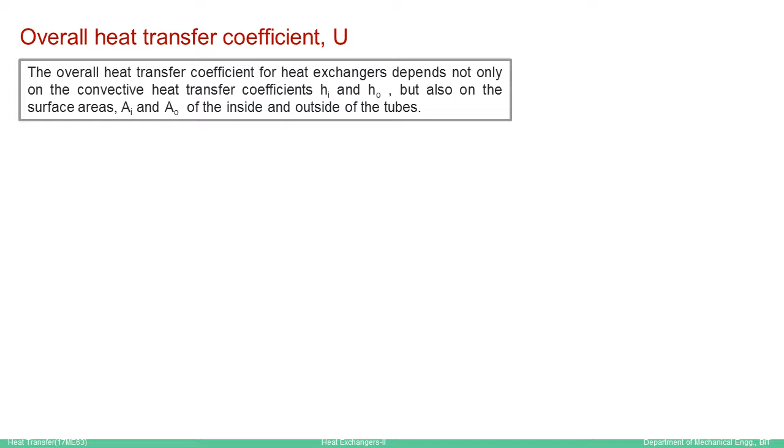Overall heat transfer coefficient in a heat exchanger is a measure of the rate of heat transfer between two fluids which are separated by a solid surface. And this does not only depend on the heat transfer coefficients Hi and H0, but also on the surface areas Ai and A0. But if the solid surface is a plane wall, then Ai and A0 can be considered equal. In such cases, U will be dependent only on Hi and H0, but most heat exchangers use tubes and/or pipes.

In such cases, it is good to consider a hollow cylinder, that is a pipe or a tube, in which Ri and R naught are the inside and outside radius. Ri is the inside radius and R naught is the outside radius. And in this case, Ti is the temperature of the hot fluid inside the pipe, and T naught is the temperature of the cold fluid outside. Similarly, Hi is the heat transfer coefficient of the hot fluid with the inside surface, and H naught is the heat transfer coefficient of the cold fluid with the outside surface.

L is the length of the pipe or the tube. K is the thermal conductivity of the material of the pipe or tube used. T1 and T2 are the temperatures of the inside surface and outside surface respectively. Q is the rate of heat transfer. Under steady state, this rate of heat transfer Q is given by this equation, where the first term gives the rate of heat transfer due to convection from the hot fluid to the inside surface, whereas the second term gives the

conduction heat transfer rate through the material, and the last term, Q is equal to 2 pi R naught L into H naught into T2 minus T naught, gives the convective heat transfer from the outside surface to the cold fluid. And this equation can be written in terms of temperature difference like this: Ti minus T1 is equal to Q by 2 pi Ri L Hi. Similarly, T1 minus T2 is equal to Q by 2 pi KL divided by ln of R naught by Ri. T2 minus T naught is equal to Q by 2 pi R naught L H naught.

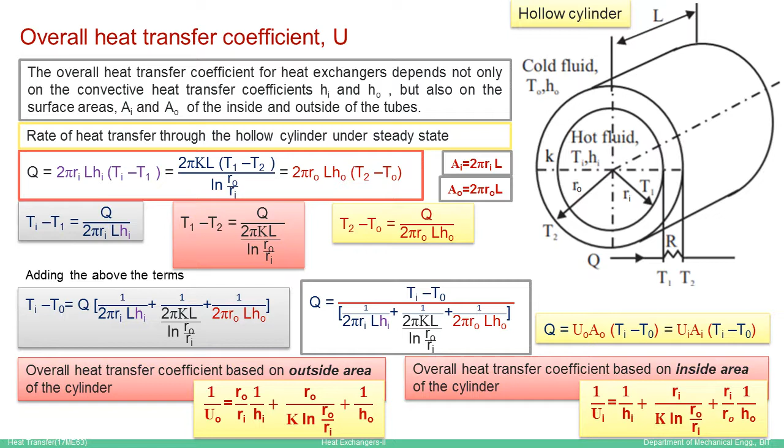To summarize the previous discussion, this equation is equated with the expression for rate of heat transfer, and using A naught equal to 2 pi R naught L and substituting that, we have obtained this overall coefficient. I want you to go through these steps and arrive at the final expression. Similarly, equating these two Q's and considering Ai is equal to 2 pi Ri L, the overall heat transfer coefficient based on inside surface area of the cylinder is obtained this way. This is a small assignment for you to work out and obtain the final expressions for U naught and Ui.

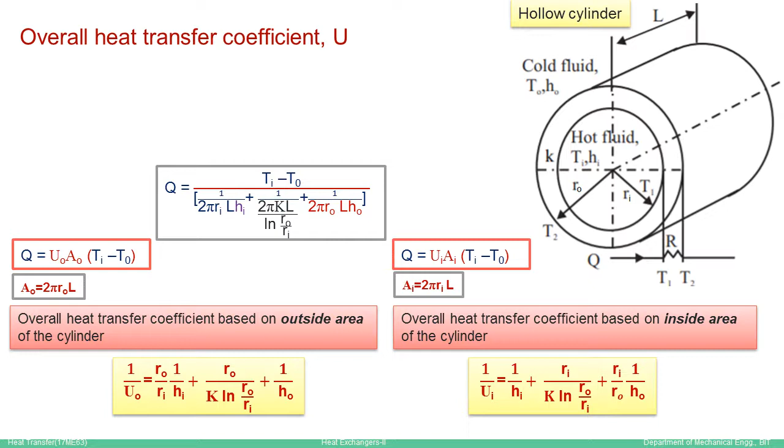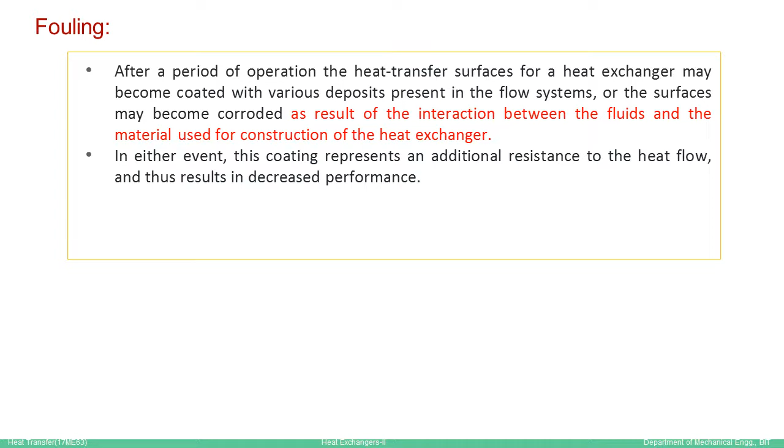Fouling is an undesirable condition in heat exchangers which reduces the performance of heat exchangers. Usually after long periods of operation, the heat transfer surfaces of the heat exchanger will get coated with some of the deposits from the materials or from the liquids itself, or sometimes the surfaces may get corroded because of the frequent interaction with the fluids. In both cases, there will be some resistance to the heat flow because of this coating formed, which results in the reduced performance.

And finally, the overall effect is to present a term called fouling factor or fouling resistance, RF, which must be included along with the other thermal resistances, so that total resistance is different from the actual resistance considered in the overall heat transfer coefficient. So an additional parameter is to be accounted for in the overall heat transfer coefficient. We'll see that in the next few slides.

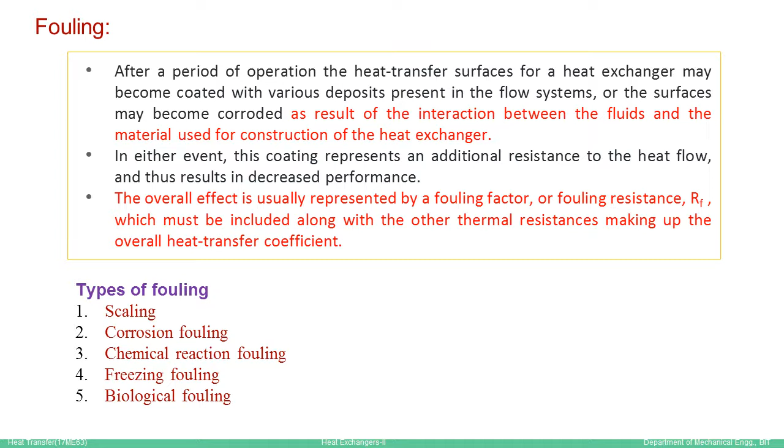Before that, we'll try to understand the different types of fouling that can happen in a heat exchanger. They are scaling, corrosion fouling, chemical reaction fouling, freezing fouling, and biological fouling.

Scaling is the most common form of fouling, and it is associated with inverse solubility salts. For most salts, solubility increases with increase in temperature. That means the higher the temperature, the more dissolved a salt is in that solution. But for some salts like calcium carbonate, calcium phosphate or calcium sulfate, their solubility decreases with increase in temperature.

When the temperature of the solution is increased, the salts get separated from the solution and get deposited on the surface of the heat exchanger. Such salts are called inverse solubility salts, and in such cases this deposit becomes a part of fouling.

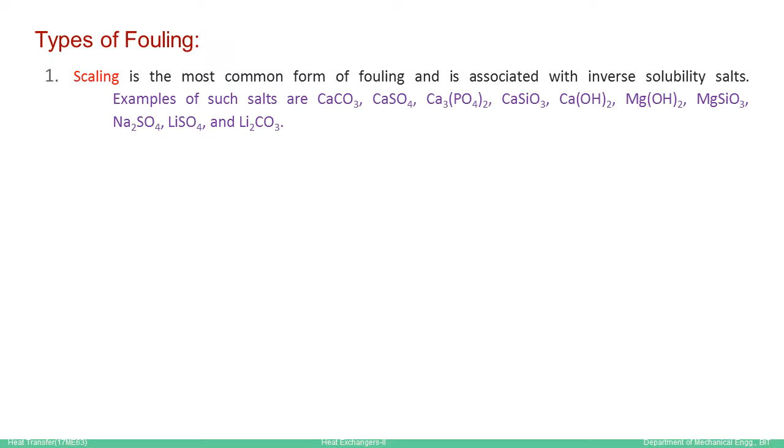The second kind is corrosion fouling, which is due to the oxidation of heat exchanger surfaces with the fluids next to the surfaces. Many metals like copper or aluminum are specific examples of these surfaces, and they oxidize, and these oxidized coatings form corrosion fouling. But most of the time, once these corroded deposits are formed, they actually prevent further corrosion of the surfaces.

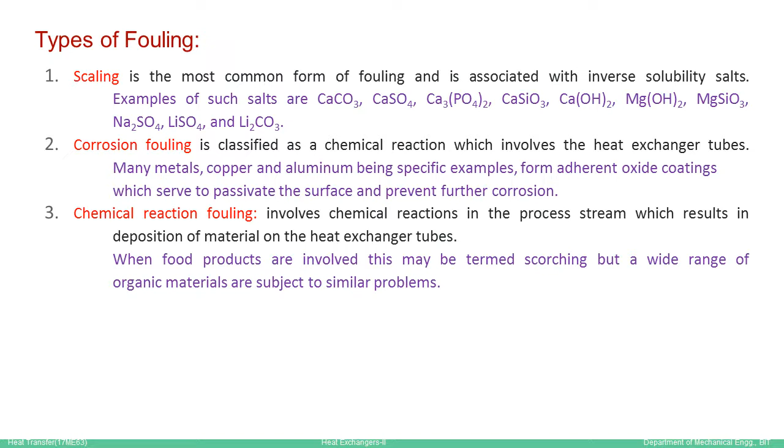Chemical reaction fouling involves chemical reactions in the process stream, that is whatever process is happening inside the pipelines, and that results in the deposition of material on the heat exchanger surfaces. Commonly you can observe this in food products, in what is called scorching, but a wide variety of organic materials are also subject to similar problems.

Freezing fouling is said to occur when a portion of a hot stream is cooled close to its freezing point for one of its components. This is a very common problem in refineries where paraffin solidifies, the wax content separates out, and that obstructs the flow and heat transfer.

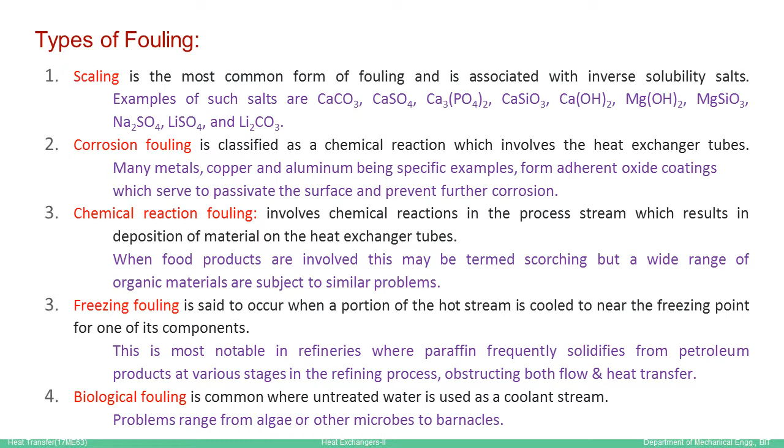And lastly, biological fouling. It is common in untreated water when impurities are present in it, and in such cases algae or microbes can deposit over the surfaces, forming biological fouling.

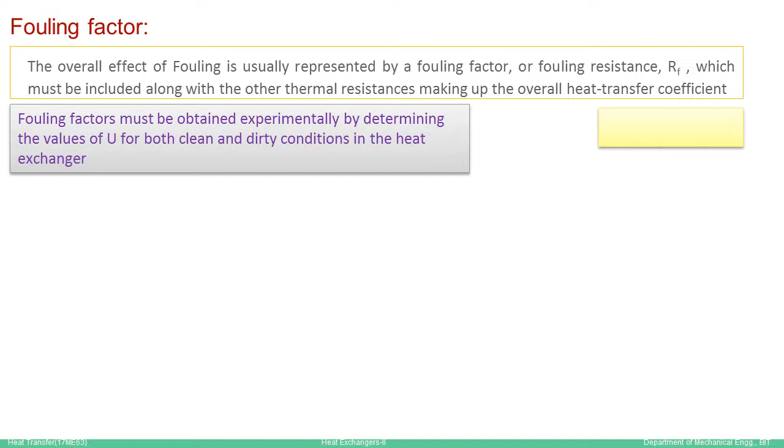We know that the overall effect of fouling is reduced performance, and we have to account for this fouling factor in the overall heat transfer coefficient. We can find the fouling factors experimentally by determining the overall heat transfer coefficient for both clean and dirty conditions in the heat exchanger. That means you have to find the overall heat transfer coefficient when the surfaces are clean, and also when they are dirty. Then you can find the fouling factor by this equation.

That is, fouling factor RF = 1/U_dirty − 1/U_clean, where U is the overall heat transfer coefficient. U for the clean surface will be greater than U for the dirty surface, so RF will always be a positive quantity.

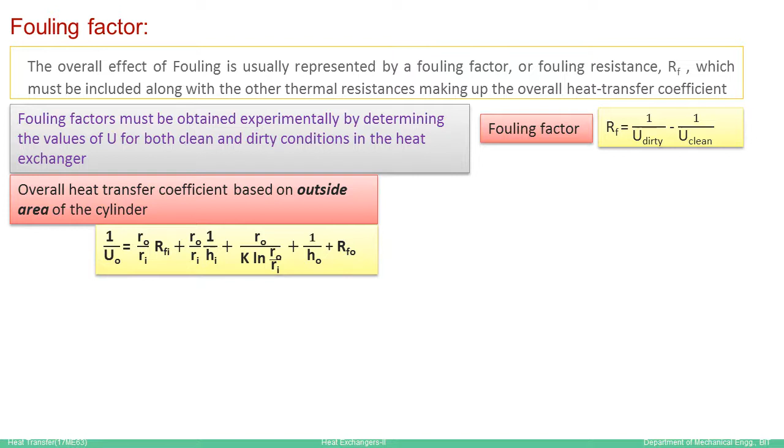Including RF, we have the overall heat transfer coefficient based on outside surface area, this one, where RFi and RFo are the fouling factors on the inside and outside surfaces of the hollow cylinder respectively. RFi has the same units as 1/hi, and similarly RFo has the same units as 1/ho. So dimensional homogeneity is maintained.